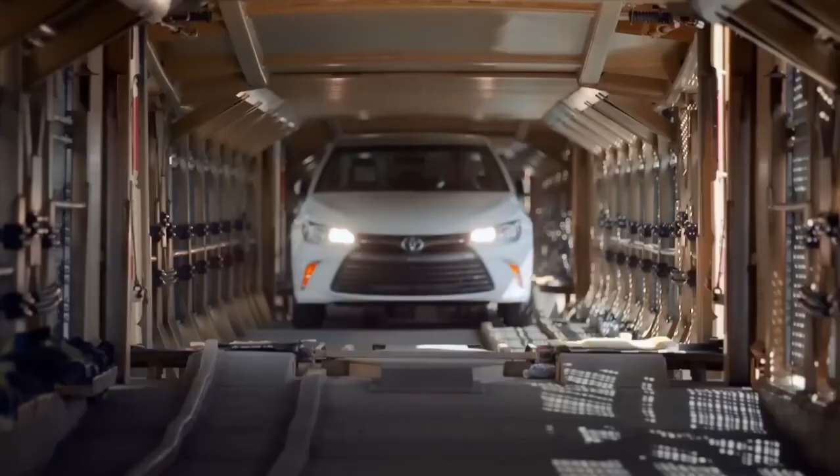While many other car makers have gone all in on electric power, Toyota's charting a brand new course. They've invented a brand new technology that's unlike anything we've ever seen before. Picture this, a revolutionary engine called the hydrogen combustion engine. It runs on hydrogen as its main fuel, hence the name.

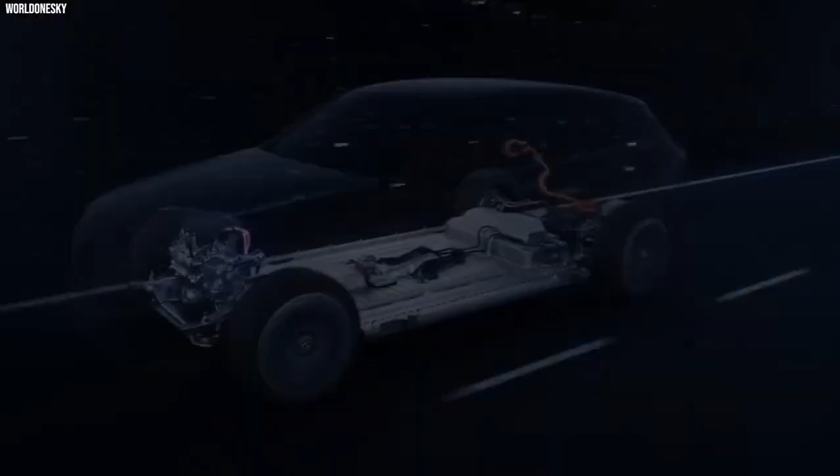Now, what's truly special about this engine is what comes out of its exhaust pipe, not harmful carbon dioxide, but pure water. It's Toyota's innovative solution to shrink our global carbon footprint. Now, Toyota is taking a whole new approach to cutting carbon emissions worldwide.

While most are hopping on the electric vehicle bandwagon, Toyota's chosen a different path with their hydrogen combustion engine. And there's a good reason for it. Hydrogen, one of the universe's most abundant elements, packs the highest energy density of any non-nuclear power source.

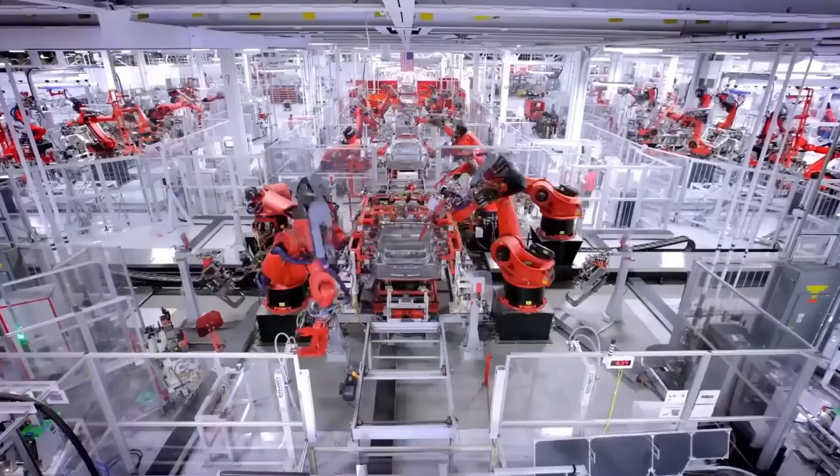When used as fuel, it's clean as a whistle, emitting nothing but water. Plus, it's safe and versatile, easily produced, stored, and transported. Surprisingly, hydrogen isn't some futuristic dream, it's already here, quietly powering various applications. From buildings to electric cars, forklifts to ships, and even trains, hydrogen is already making waves, proving that not everything needs gasoline to run.

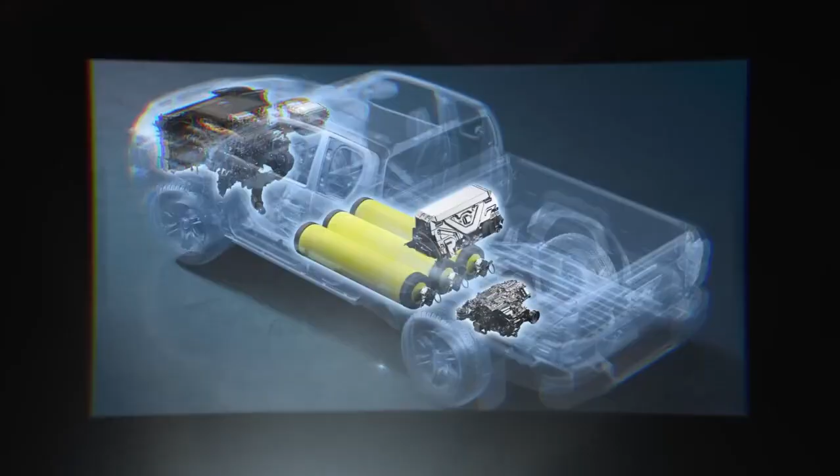Imagine a magic box inside Toyota's hydrogen combustion engine called a fuel cell. What does this magic box do? It turns hydrogen, a special gas, into electricity.

Now, let's zoom in on a cool car, the Toyota Corolla Cross H2 concept car. It's got a snazzy 1.6-liter turbocharged, 3-cylinder engine that guzzles only hydrogen. But how did Toyota pull off this wizardry?

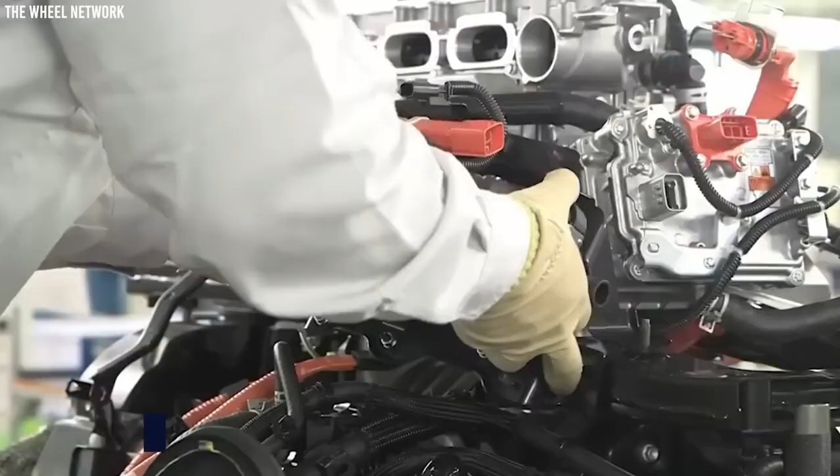Well, this was the moment when Toyota kicked off a revolution in the electric vehicle world. These new engines were game changers, ready to shake up the whole industry forever. Toyota uses tough, armored tanks to stash the super flammable hydrogen fuel.

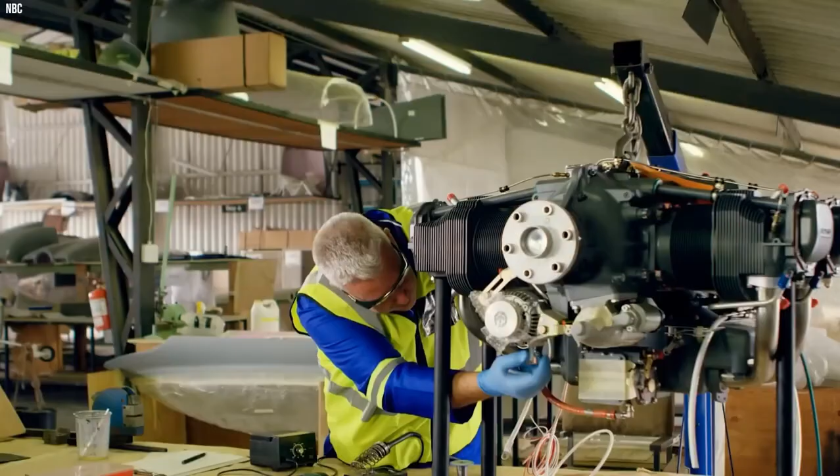They got this bright idea from their FCEV pal, the Mirai. And guess what? These tanks don't have to be huge. The Corolla Cross H2 concept car runs on just 5 kilograms of hydrogen.

Sounds like a little, right? But guess what? That tiny amount can power this car for a whopping 300 miles. And get this, the only thing it spits out is 50 liters of water. Not too shabby, considering water is harmless compared to the nasty carbon dioxide.

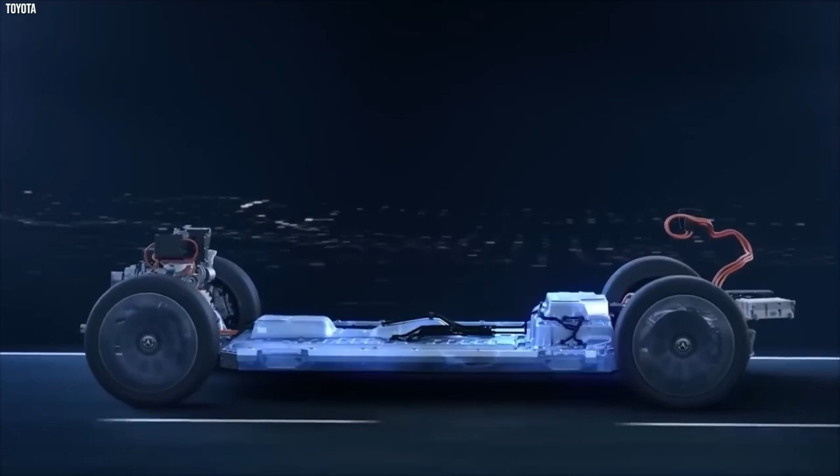But wait, Toyota teamed up with Yamaha Motor to create a beastly V8 engine powered solely by hydrogen. This bad boy pumps out a jaw-dropping 455 horsepower and 398 pound-feet of torque. And for that extra oomph, they slapped on an 8-to-1 top-mounted exhaust manifold, giving it a distinct, high-frequency growl.

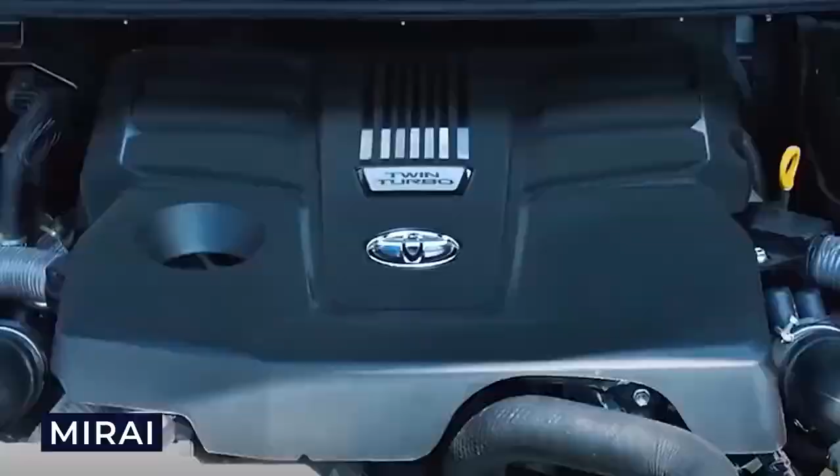When you stack up Toyota's hydrogen combustion engine against other electric vehicles, it's got some serious perks. For starters, it boasts a longer range, and refueling faster than a drag race pit stop. By achieving this, it cuts down on the need for materials like lithium and nickel, which are crucial for making EV batteries. And the battery in this car isn't as hefty as those in traditional EVs.

Interestingly, there is already lots of feedback coming in for this mind-blowing engine, the revolutionary hydrogen engine.

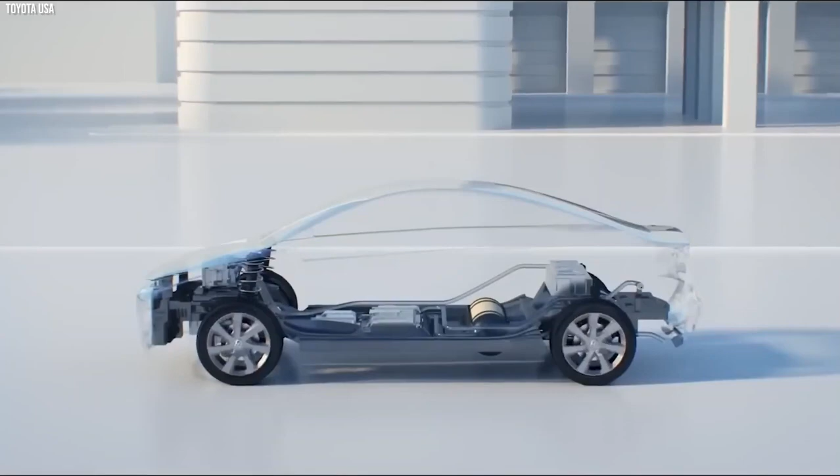The feedback on Toyota's new hydrogen combustion engine has been overwhelmingly positive so far. It's not just another engine, it's a game changer in the automotive world. Why? Because it's one of the greenest engines out there, leaving nothing but water in its wake. Plus, it offers a longer driving range, quick refueling times, and cuts down on the need for scarce materials. But we're still waiting to see how it performs in real-world tests.

But mark my words, it won't be long before these cars hit the streets in droves. And guess what? If these hydrogen-powered engines prove successful, the Japanese government has big plans.

They aim to have a whopping 200,000 fuel cell-powered vehicles cruising around by 2025, that's just a year away. And by 2030, they are shooting for a staggering 800,000. Of course, to make this happen, they'll need to beef up the country's network of refueling stations.

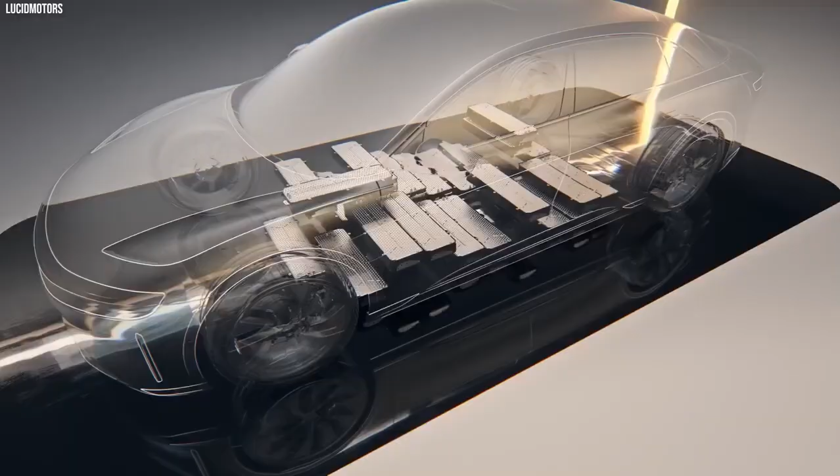Let's break down the perks of this engine, starting with the most obvious: it's super eco-friendly. How so? Well, because it runs on hydrogen, it doesn't spit out any nasty pollutants like traditional gas guzzlers. Plus, hydrogen itself is squeaky clean compared to old-school gasoline.

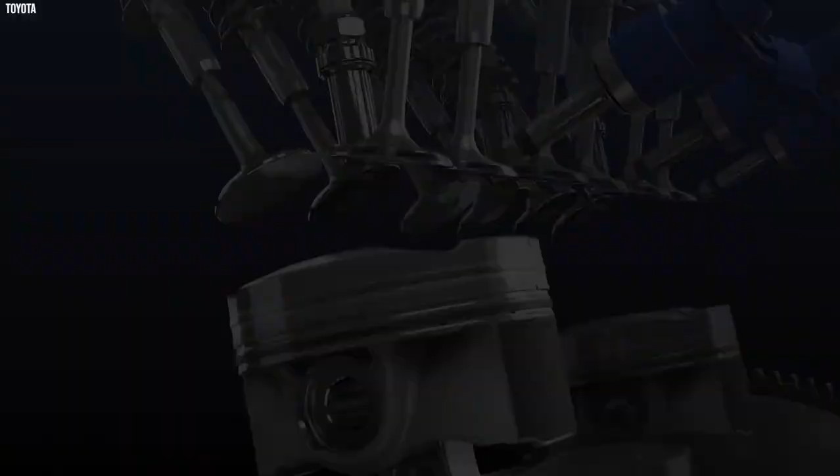Now, onto advantage number 2, this engine rocks a top-notch cooling system. A smart water cooling setup tackles the pesky problem of engine overheating. With this nifty system in place, the engine's performance and lifespan get a major boost. Say goodbye to sweaty palms worrying about overheating, this engine's got your back.

Last but not least, advantage number 3, it's all about familiar tech. Yep, you heard that right. Despite its futuristic vibes, this engine sticks to good reliable technology that we're all familiar with. So, no need to fret about learning a whole new set of skills to handle it.

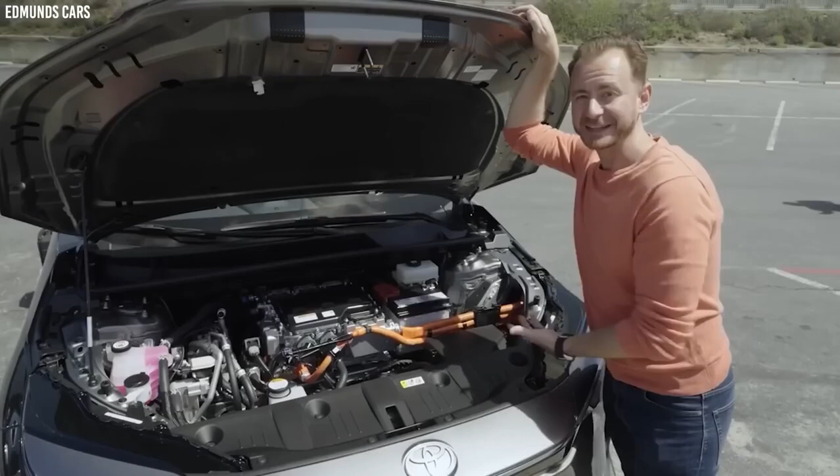Let's delve deeper into the perks of this engine. Firstly, its compatibility with traditional engine systems makes it a dream to integrate into existing automotive designs. This means Toyota can easily adapt their current vehicle models to accommodate this innovative engine, streamlining the manufacturing process and potentially bringing eco-friendly technology to a wider range of cars.

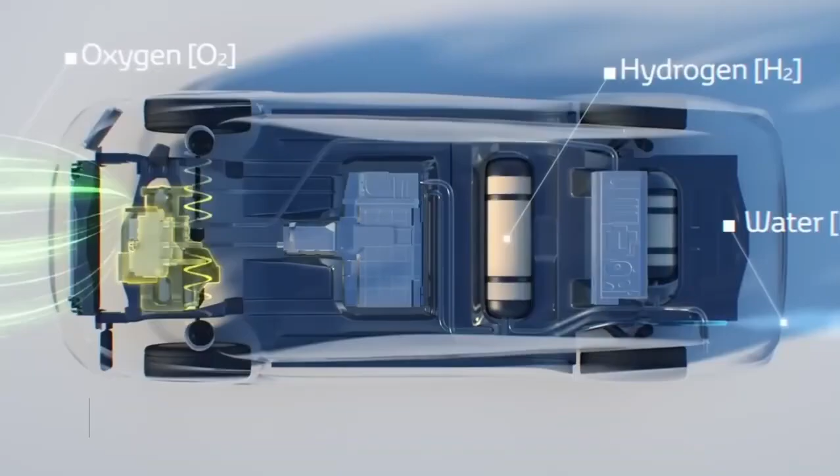Now, while hydrogen-powered engines are an innovation like no other, they are not without their own peculiar challenges. Challenges of the hydrogen engine. While this engine boasts eco-friendliness, not all hydrogen production methods are created equal in terms of environmental impact.

Currently, a significant portion of hydrogen is derived from fossil fuels, like natural gas, which isn't exactly planet-friendly. To truly maximize the green benefits of this engine, automakers like Toyota must push for advancements in sustainable hydrogen production methods, such as electrolysis powered by renewable energy sources like wind or solar.

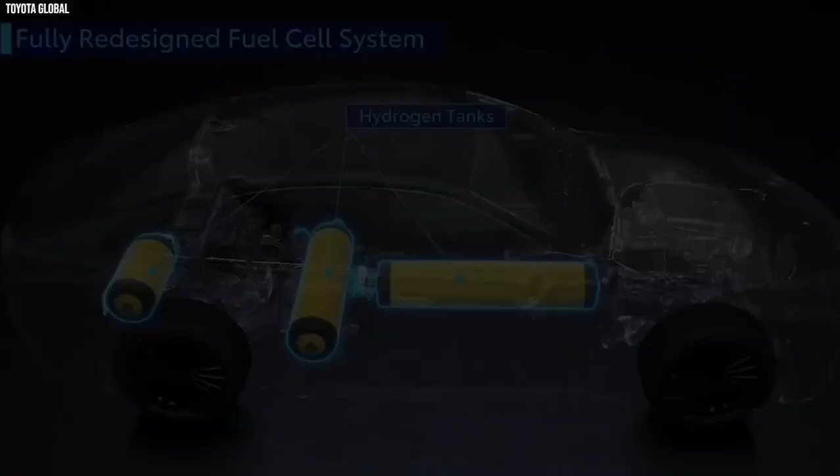But that's not the only hurdle. Even if hydrogen production becomes more eco-friendly, there's still the matter of infrastructure. Imagine you're cruising in your hydrogen-powered car but suddenly realize you need a refill. Where do you go? Unfortunately, hydrogen fueling stations are still relatively sparse compared to gasoline stations. This poses a challenge for the widespread adoption of hydrogen-powered vehicles.

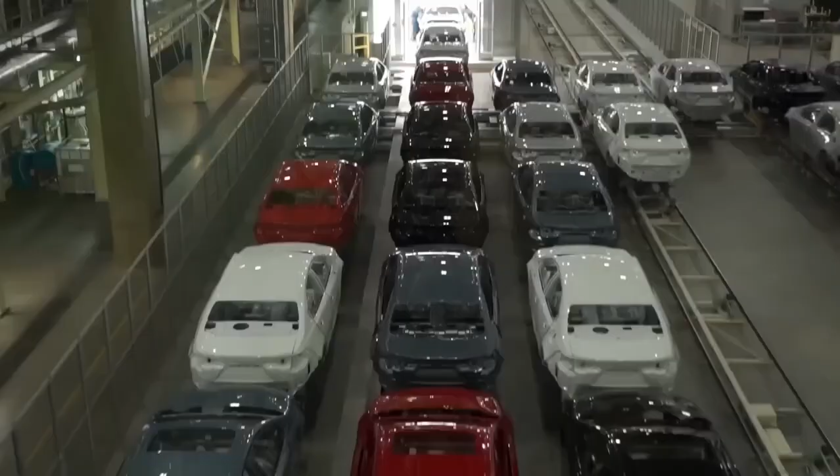To address this, companies and governments must invest in expanding the hydrogen refueling infrastructure, ensuring that drivers have convenient access to fuel wherever they go.

So, while the hydrogen combustion engine holds great promise for reducing emissions and revolutionizing the automotive industry, there are still hurdles to overcome. However, with continued innovation and investment, these challenges can be overcome, paving the way for a greener future on the road. Now, onto the technical side.

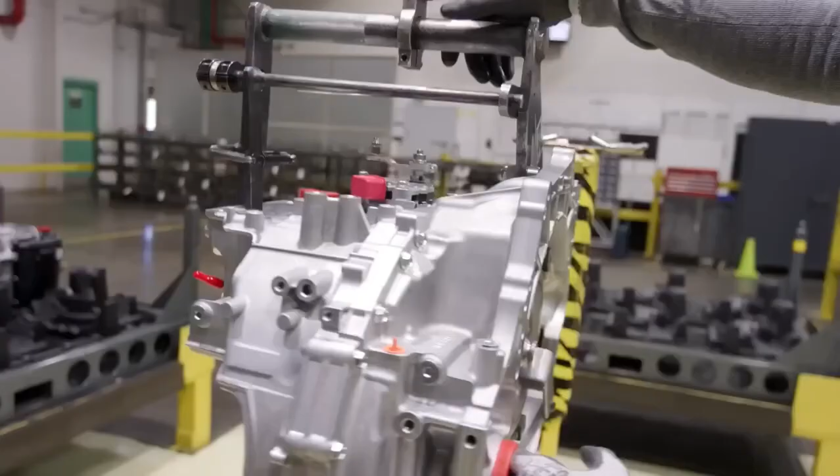While hydrogen engines share similarities with traditional engines, they are not without their complexities. Take, for example, the dual water injection system. It's a clever mechanism, but it adds layers of intricacy to the engine's design. Plus, these engines require precise control from the Engine Control Unit, ECU, which further complicates matters.

Complexity comes with a hefty price tag. Manufacturing these high-tech engines isn't cheap, and the same goes for maintenance. Finding specialized parts for repairs can be a headache, driving up costs for both the automaker and the owner.

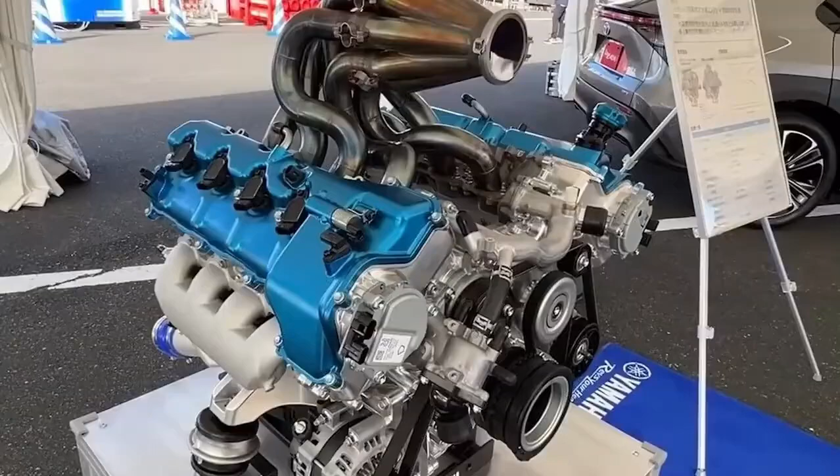Interestingly, even if Toyota ramps up production of these engines, they'll still face the challenge of consumer acceptance. Right now, the technology is still in the testing and development phase. And even when it's ready for prime time, it'll take some time before consumers embrace it fully.

Despite these hurdles, Toyota's commitment to sustainable transportation is commendable. By venturing into hydrogen combustion engines, they are paving the way for a greener future in the automotive industry. It's a bold move that shows their dedication to innovation and environmental stewardship, even if the road ahead is filled with challenges. However, Toyota has proven to be committed to offering sustainable vehicles.

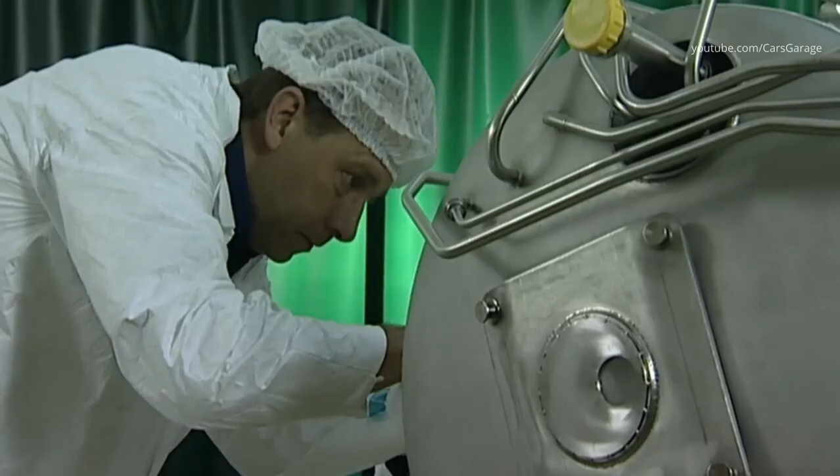Toyota's terrific turbocharged triumph. Apart from their electric and hybrid engines, Toyota has unveiled another innovative solution. Enter the hydrogen combustion engine, showcasing the company's commitment to offering diverse sustainable vehicle options.

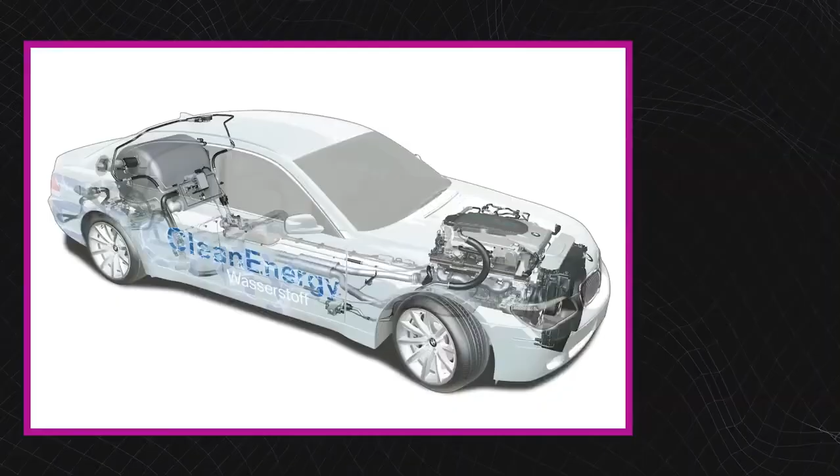Now, we've been singing praises for the combustion engine, highlighting its potential to shake up the entire electric vehicle (EV) industry. But how does it differ from the traditional internal combustion engine? What sets it apart technically? To unravel these mysteries, let's zoom in on one of Toyota's remarkable achievements, the 1.6-liter, 3-cylinder turbo engine. You might be wondering why we're focusing on this particular engine.

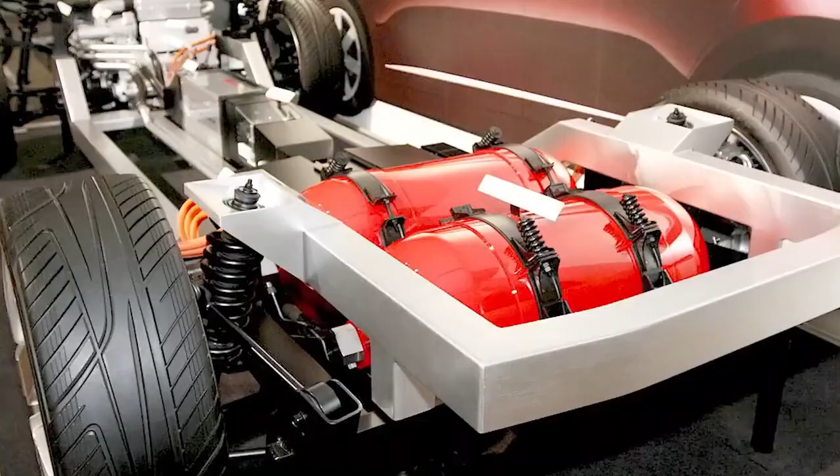Well, it's because it's one of Toyota's shining stars in the world of hydrogen engines. Currently powering the Corolla Cross hydrogen prototype, this engine is proving its mettle and exceeding expectations. This engine is truly a masterpiece, seamlessly blending the best of both worlds, classic design and groundbreaking technology. But it's unlike anything you've seen in a traditional internal combustion engine.

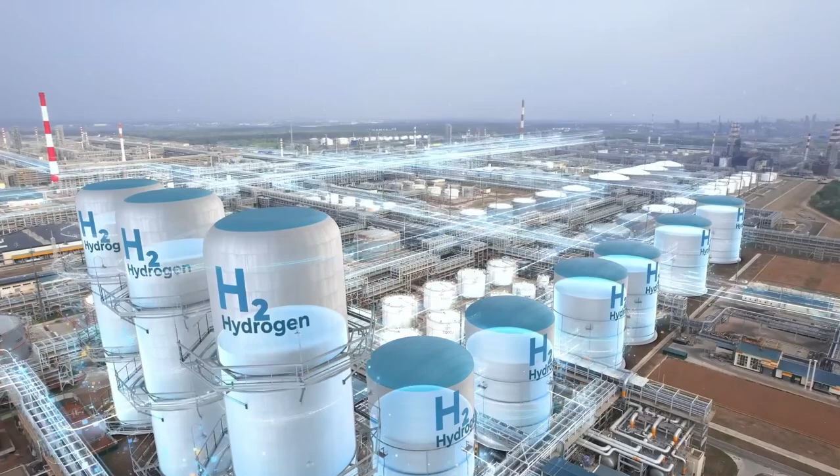To adapt this engine to run on hydrogen fuel, Toyota had to roll up their sleeves and get creative. They made a slew of modifications, tweaking every component to ensure seamless compatibility with hydrogen. It was a bold move that left many scratching their heads.

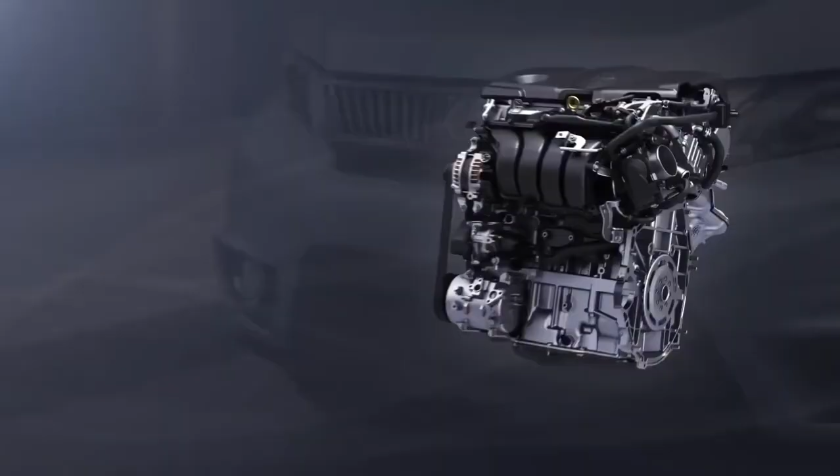Now, let's talk about the million-dollar question. How did Toyota manage to maintain the engine's stellar performance while transitioning to a completely different fuel source? The hydrogen combustion process is a delicate dance between fuel and engine, orchestrated with precision to deliver top-notch performance without compromising on efficiency or environmental friendliness.

When it comes to handling and burning fuel, hydrogen is a whole different ballgame compared to gasoline. That's why this engine uses a fancy high-pressure hydrogen direct injection system, a far cry from the usual fuel injection setups you see in traditional engines. With this system, the engine can carefully control how hydrogen is pumped into the combustion chamber, fine-tuning performance and efficiency to perfection. But how does this entire fancy tech affect the engine's overall performance?

Despite running on hydrogen, this engine packs a serious punch. The 1.6-liter powerhouse churns out enough power and torque to give its gasoline-powered counterparts a run for their money. And you know what the cherry on top is? It's all thanks to the turbocharger, a superhero of sorts in the engine world. This little gizmo ensures the engine gets the extra boost it needs to perform at its peak.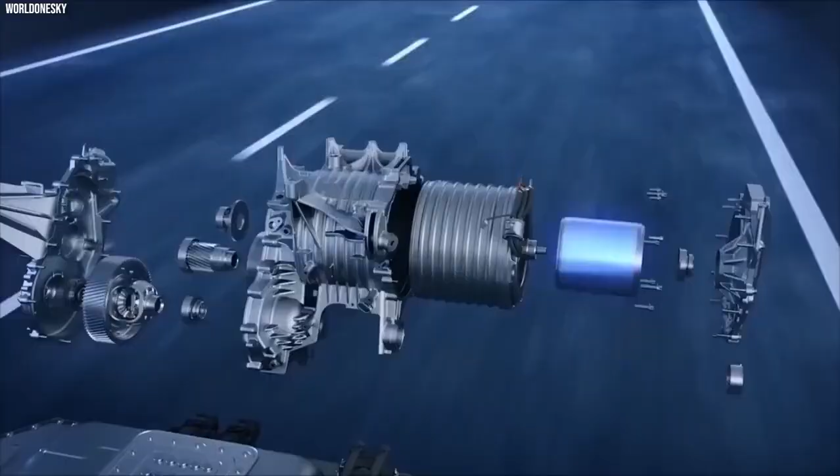Besides, there's been some chatter about whether turbocharging is the right move for a hydrogen engine. It's a valid concern, considering hydrogen's unique properties. But rest assured, Toyota's got some tricks up its sleeve to tackle this challenge head-on.

The big worry here is that hydrogen isn't as dense as gasoline. What does that mean? It means the engine needs a lot more hydrogen to produce the same amount of energy as gasoline would. But fear not, Toyota's engineers aren't ones to back down from a challenge. They've rolled up their sleeves and made sure the turbocharger and other engine parts are optimized to handle hydrogen's unique properties.

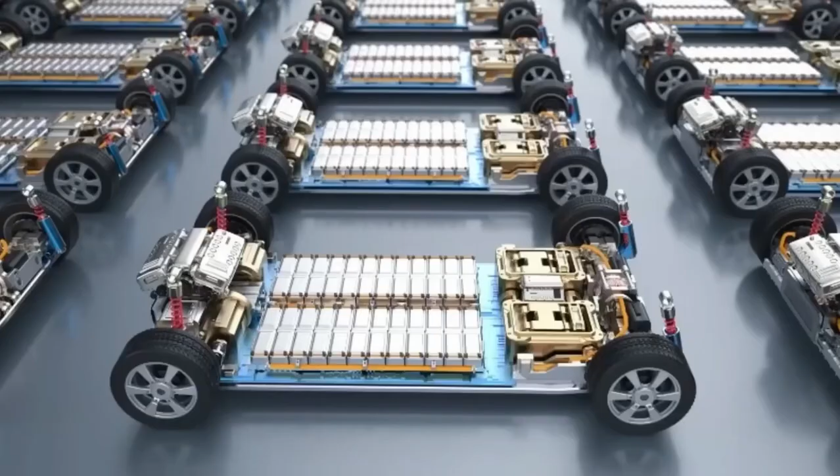But this engine isn't just efficient, it's super efficient. Turns out, hydrogen combustion engines are way more efficient than traditional ones, especially when things get intense during heavy-duty tasks. And you know what that means? Better fuel economy and less harm to the environment. With this boost in efficiency, the engine sips fuel more slowly, meaning fewer emissions are belched out into the air.

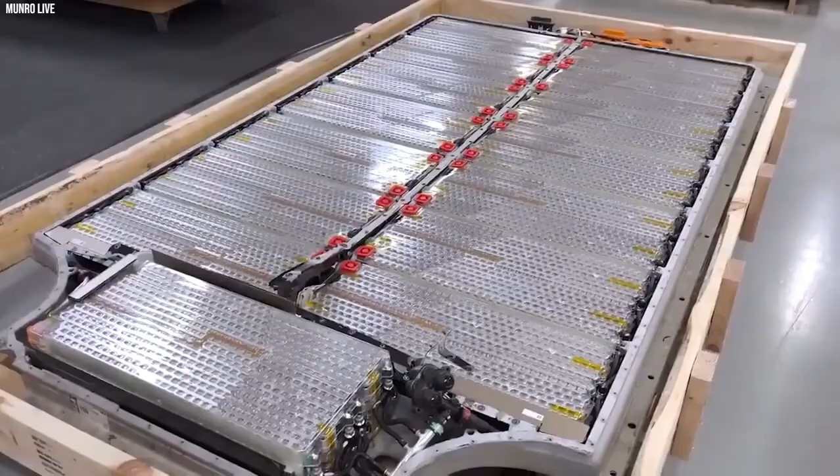And get this, the only thing that comes out of the tailpipe is water vapor. Yep, you heard that right, near-zero emissions. That's what makes this engine one of the greenest options out there, and a true champion for the environment. But that's not all. Toyota went even further to achieve an unprecedented feat with this engine.

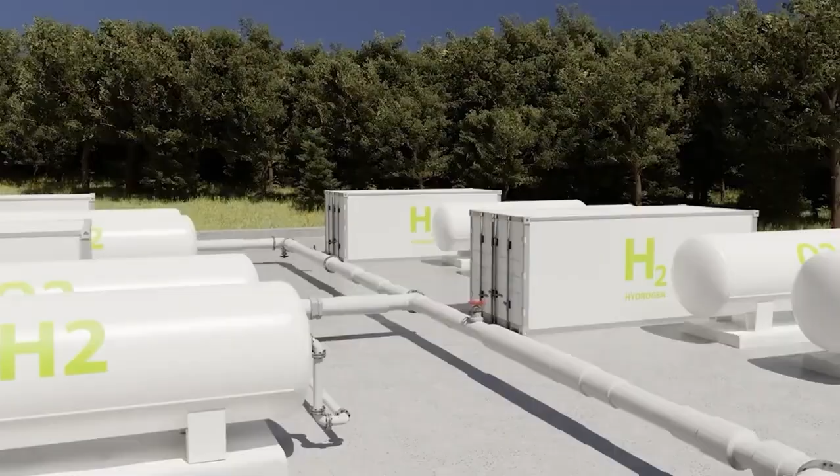Toyota's pioneer hydrogen and electric technologies. According to Toyota's CEO, the company's commitment to achieving near-zero emissions with their hydrogen engine isn't just a passing fad, it's a key part of their broader mission to combat climate change. As they march towards carbon neutrality, they are not relying on just one strategy. Instead, they are embracing a multifaceted approach that combines hydrogen and electric technologies.

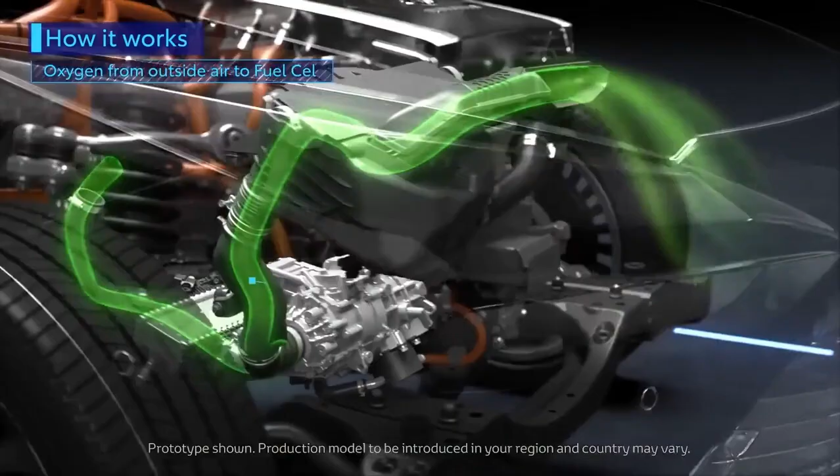But why is the emphasis on hydrogen? Well, aside from its eco-friendly emissions profile, hydrogen boasts incredible versatility. It's not just for powering passenger cars, it has the potential to revolutionize various sectors, from transportation to industry to energy storage. The Toyota CEO also states that Toyota's investment in hydrogen technology isn't limited to passenger vehicles.

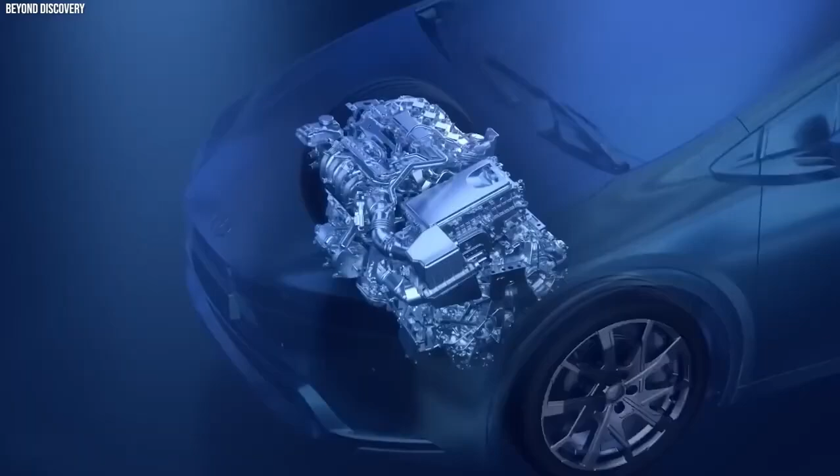They are exploring its applications across the board, from buses and trucks to forklifts and even stationary power generation. This holistic approach underscores Toyota's commitment to driving sustainability across all aspects of society.

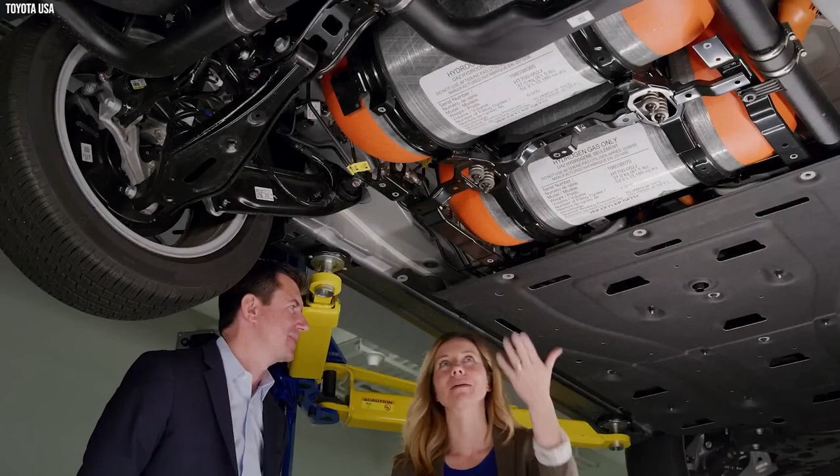Moreover, hydrogen isn't just a cleaner alternative to fossil fuels, it's also renewable. By harnessing renewable energy sources like wind or solar to produce hydrogen through processes like electrolysis, Toyota is helping to create a truly sustainable energy ecosystem. So, while achieving near-zero emissions with their hydrogen engine is a significant milestone for Toyota, it's just one piece of the puzzle in their larger vision for a greener, more sustainable future.

Toyota has already implemented it in commercial vehicles and even public transportation solutions. But can hydrogen alone get us to carbon neutrality?

Well, Toyota's not putting all their eggs in one basket. They've recognized the importance of diversifying their approach, which is why they've also embraced electric vehicle (EV) technology.

Now, the EVs. Toyota's not taking the same route as other car makers that are solely focused on EVs. Instead, they are taking a more nuanced approach. They know there are some big challenges with EVs, like limited range, long charging times, and the environmental impact of battery production and disposal. To tackle these hurdles head-on, Toyota's offering a range of powertrain options. You've got your hydrogen fuel cell vehicles, plug-in hybrid electric vehicles (PHEVs), and good old battery electric vehicles (BEVs).

With this diverse lineup, Toyota's aiming to meet the needs of a wide range of customers. Whether you're looking for eco-friendly commuting or long-distance travel, they've got something for everyone. It's all part of their commitment to driving sustainability forward while keeping you on the road in style.

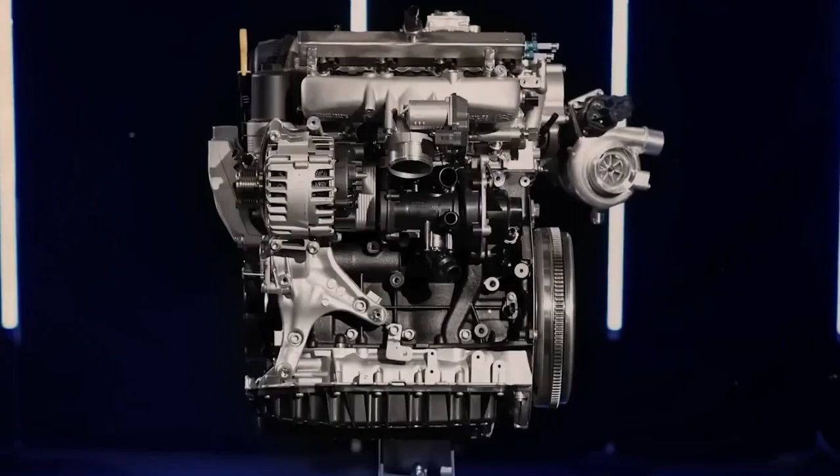This whole diverse strategy is all about reaching carbon neutrality. Achieving carbon neutrality is a big goal. But Toyota didn't just stumble upon this, they've found different ways to make it happen. One key thing they've realized is that different places have different energy sources, rules, and policies about the environment. So a one-size-fits-all approach might not cut it when it comes to cutting down global carbon emissions.

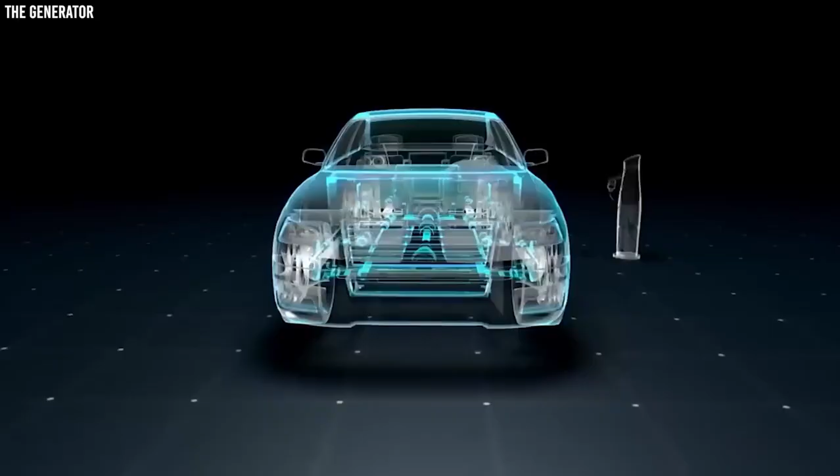Take, for instance, areas that use renewable energy. For them, battery electric vehicles (BEVs) would be the perfect fit. But in places where hydrogen production comes from renewable sources, fuel cell electric vehicles (FCEVs) and hydrogen internal combustion engine vehicles (HYCEs) might be a better bet.

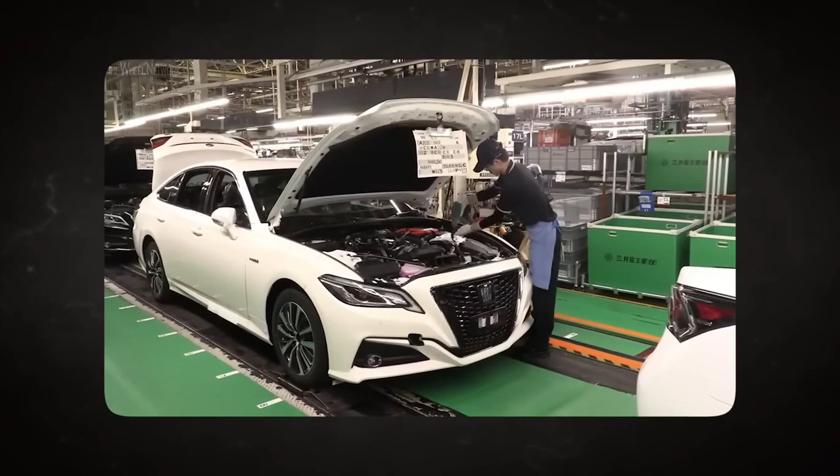And Toyota's commitment to carbon neutrality goes beyond just what comes out of the tailpipe. Now the company is doing a whole lot of things differently. They are thinking of the big picture and looking at everything from manufacturing to how you use the car. Developing sustainable technologies for a greener environment.

Toyota is really getting into the swing of things when it comes to reducing the carbon footprint of its manufacturing processes. They're not just talking the talk, they're walking the walk by promoting recycling, making sure resources are used efficiently, and putting their money where their mouth is with investments in renewable energy projects. Besides, there's always more to be done when it comes to reaching big goals like carbon neutrality.

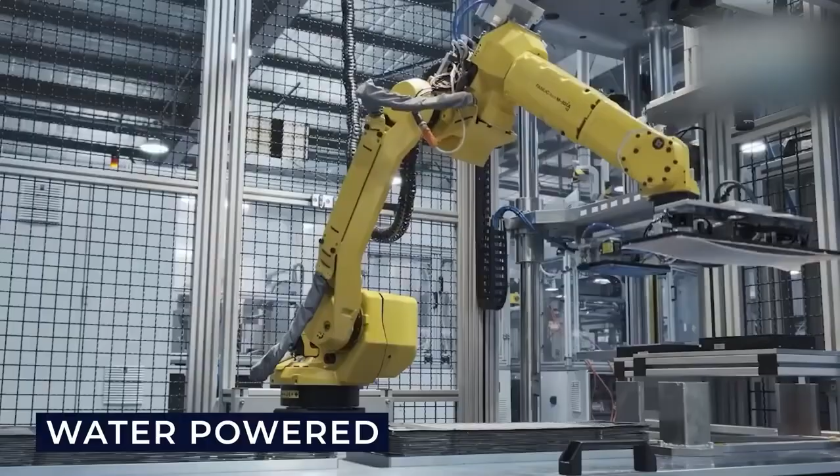To really understand the impact of Toyota's strategy, you've got to zoom out and look at the big picture. Achieving a society that's nearly carbon neutral is no small feat. It's not just about tweaking vehicle technology, it's also about how we make and use energy. But fear not, Toyota's not taking a one-size-fits-all approach. They are tackling these challenges head-on with a multi-pronged strategy that covers all the bases.

And the best part is that it's not just about achieving carbon neutrality. This move from Toyota comes with a whole bunch of environmental perks that you might not even realize. Let's take a moment to rewind and unpack the advantages of Toyota's hydrogen-powered internal combustion engines. The promise of hydrogen engines.

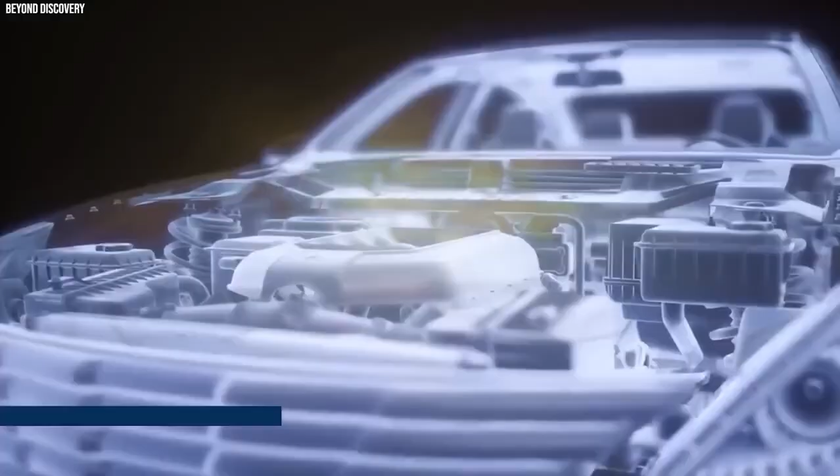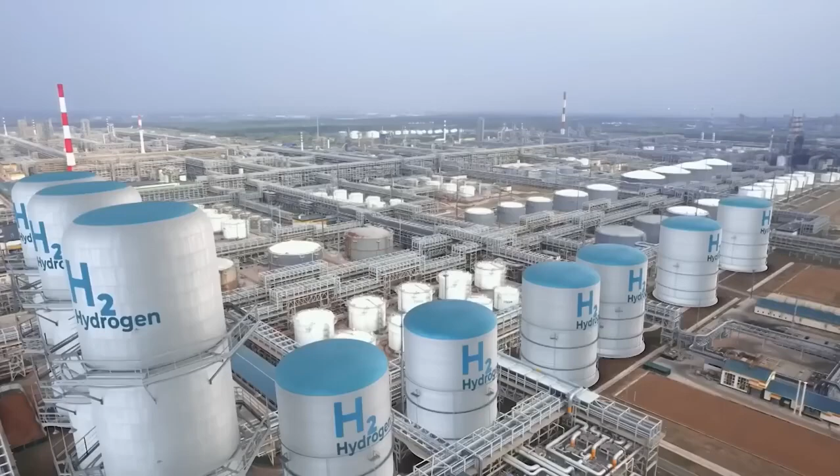In a world where sustainability is becoming increasingly crucial, these engines present a tantalizing prospect for the automotive industry. But how do they stack up against their electric counterparts, like hybrid electric vehicles (HEVs) and plug-in hybrid electric vehicles (PHEVs)? To understand this, we need to delve deeper into what sets hydrogen engines apart, especially in terms of their environmental impact. The real game changer here is emissions.

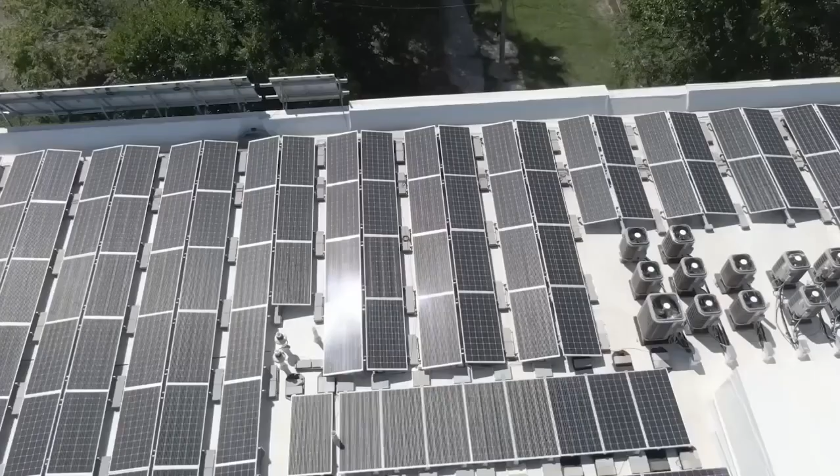Traditional gasoline engines churn out significant amounts of carbon dioxide, contributing heavily to the greenhouse effect and global warming. However, Toyota's hydrogen engines operate on a whole different level. They produce zilch, nada, zero carbon dioxide during their entire lifespan. This means they are not just reducing emissions, they are eliminating them altogether.

Zero emissions and green technology. But achieving zero carbon emissions isn't some far-off fantasy. It's a tangible reality, thanks to advancements in hydrogen technology. And Toyota is at the forefront of this green revolution, paving the way for a cleaner, greener automotive future.

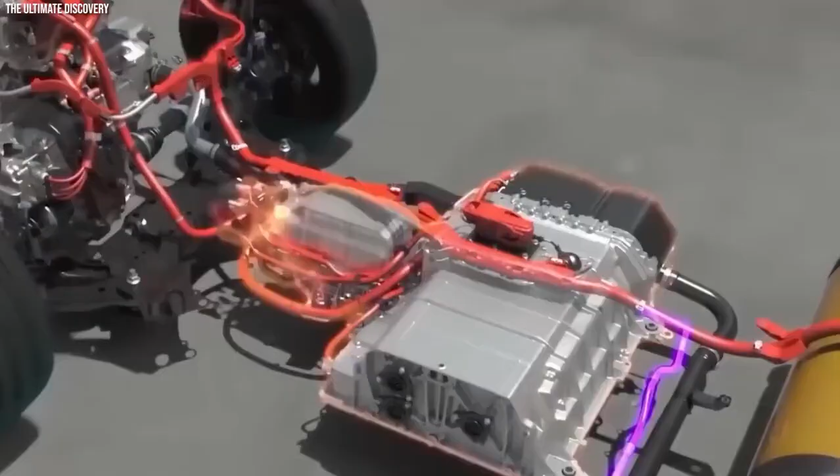However, above all this, all vehicle companies have their secrets in creating cars, and Toyota has one too. The magic behind hydrogen engines lies in their combustion process. When hydrogen fuel burns, it joins forces with oxygen from the air, creating energy.

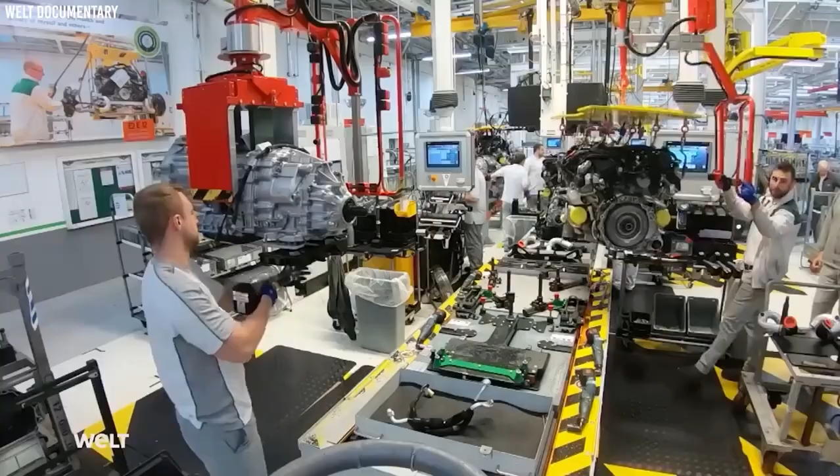Now, let's not delve too deeply into the chemistry, but when hydrogen and oxygen mingle, they create H2O, water vapor, plain and simple. And get this, that's the only thing that comes out of the whole shebang. Hybrid electric vehicles versus hydrogen engines.

But what about hybrid electric vehicles (HEVs) and plug-in hybrid electric vehicles (PHEVs)? HEVs team up a gasoline engine with an electric motor, while PHEVs charge their batteries by plugging into an outlet. Both promise better fuel efficiency and lower emissions compared to old-school gasoline vehicles. But here's the catch: they still rely on gasoline, which means they still emit carbon dioxide when running. It might not be as much as before, but it's still there, lingering in the air.

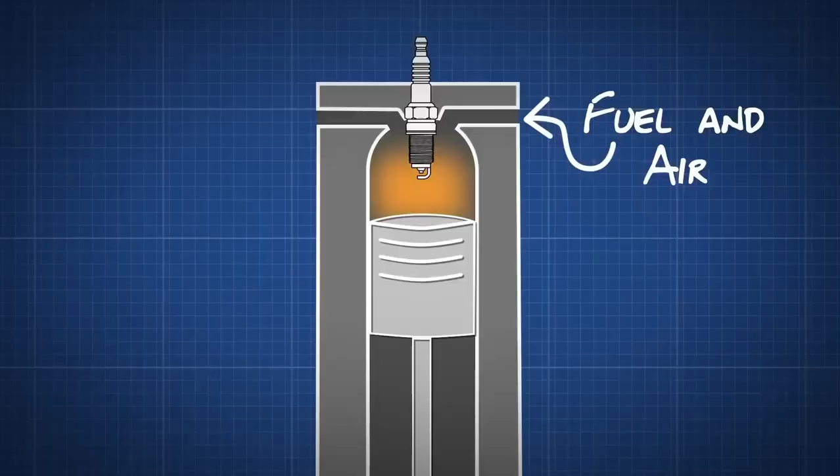On the flip side, hydrogen engines offer a whole new world of possibility: true zero-emission driving. That's right, no carbon dioxide emissions to be found here. It's a game-changer in the fight against pollution and climate change. For hydrogen engines to truly be environmentally friendly, the hydrogen fuel needs to be sourced sustainably, coming from renewable sources like wind or solar power.

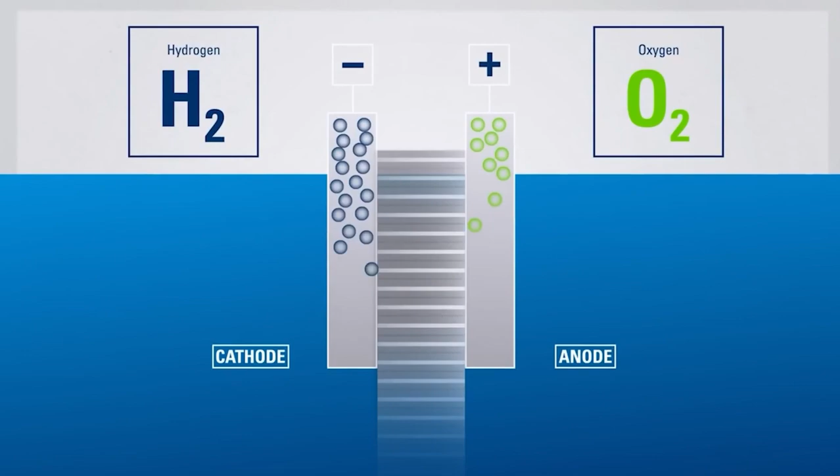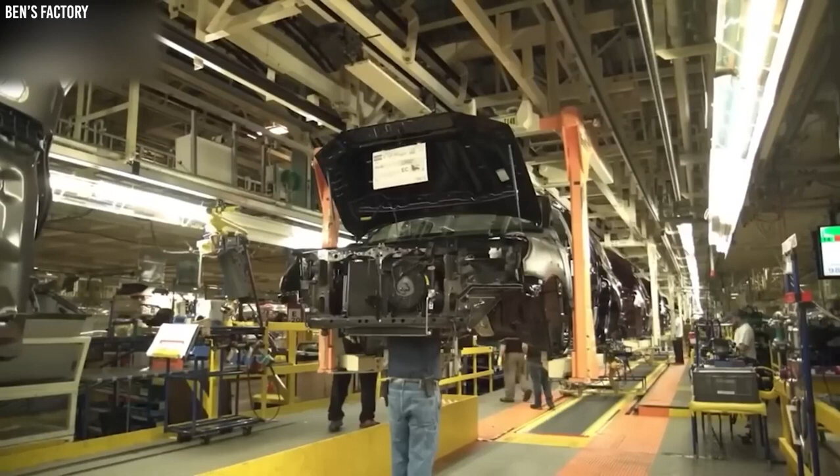Considering life cycle emissions is another crucial thing to think about. When you're putting together HEVs and PHEVs, you need batteries, and making those batteries is no walk in the park. It takes a whole lot of energy-intensive manufacturing processes that pump out a bunch of carbon into the environment, which isn't great news. But hydrogen engines sidestep all these issues. The production of hydrogen fuel, especially when made from renewable sources like wind or solar power, can be way gentler on the environment than battery production. Taking all of this into account, hydrogen engines offer a more sustainable overall life cycle.

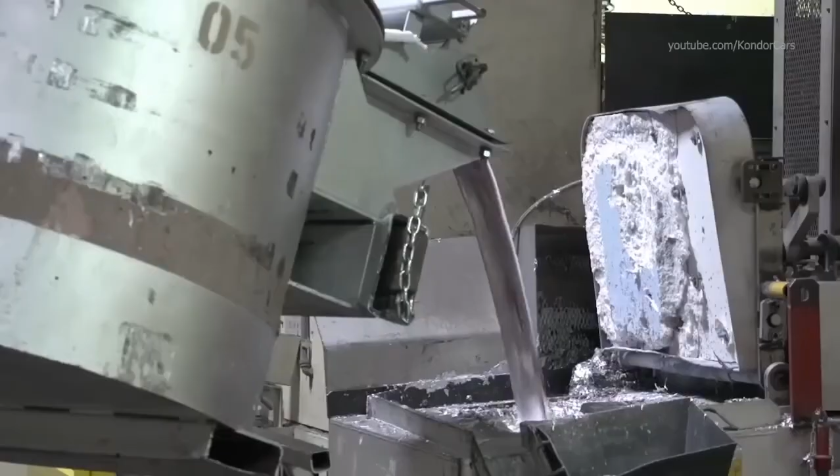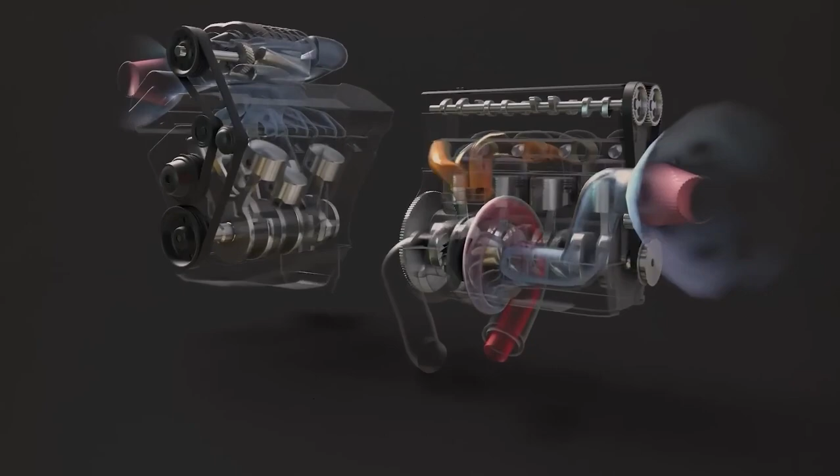The efficiency of hydrogen engines is remarkable. We've already seen that hydrogen combustion engines are practically wizards when it comes to efficiency, leaving traditional combustion engines in the dust and paving the way for a greener, more efficient future. Especially in heavy-duty applications, hydrogen engines truly shine, standing toe-to-toe with hydrogen fuel cells in terms of efficiency. Fuel cells hit peak efficiency at low load, but that efficiency takes a nosedive under heavier load. Hydrogen combustion engines hit their stride when the pressure's on, like superheroes of the engine world, ready to tackle any challenge, especially where top-notch performance is non-negotiable. Moreover, fighting against climate change and dwindling resources doesn't strike out either.

Redefining the driving experience, Toyota is coming up with engines that are game changers in fighting against climate change and decreasing resources. Toyota's hydrogen engines are the real deal when it comes to cleaner, greener transportation. They've made big promises and delivered without sacrificing a bit of performance or practicality.

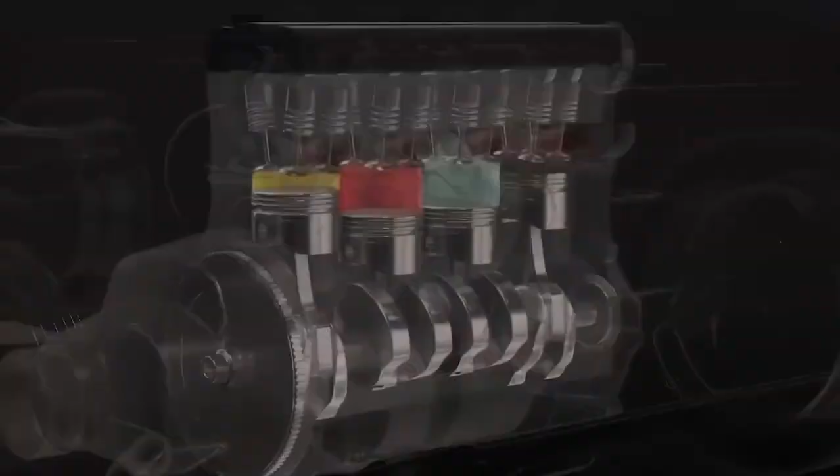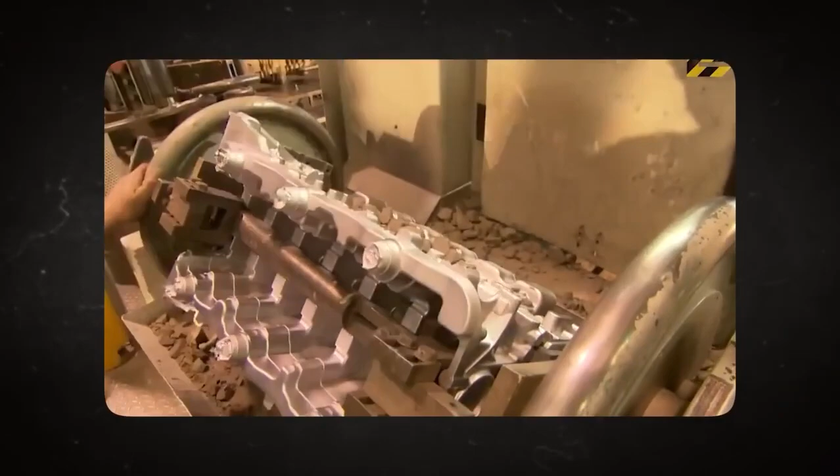But how do these engines pull off performance that rivals gasoline engines? It all boils down to the nature of hydrogen as a fuel. Compared to gasoline, hydrogen burns faster, and when I say faster, I mean lightning fast. This rapid combustion translates to lightning fast responsiveness, a crucial ingredient for those who love to feel the power at their fingertips when they hit the gas pedal.

Does all this snazzy performance affect the overall driving experience? With a conventional internal combustion engine, drivers expect a certain level of performance. They want that immediate smooth response and that signature growl that makes them feel like they're in the driver's seat of a powerhouse. You know what they're talking about, like when you hear that Dodge Charger revving up, ready to tear up the road. It's all about that raw, visceral experience behind the wheel.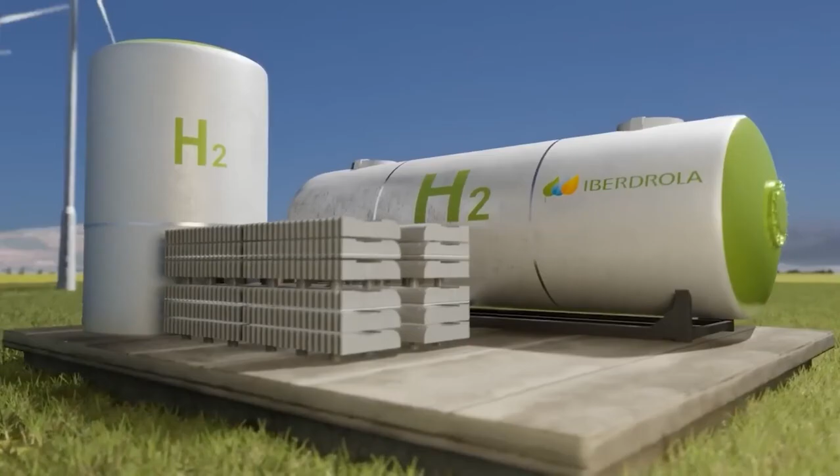The amazing thing about hydrogen internal combustion engine vehicles (HICEVs) is that they can recreate the same driving experience as traditional cars. Even though they run on a clean fuel source, drivers of Toyota's hydrogen-powered cars can still feel that same sensation they get from driving a regular car, from the rumble of the engine, which many car enthusiasts say is a crucial part of the driving thrill, to the sheer power it delivers. It's all there.

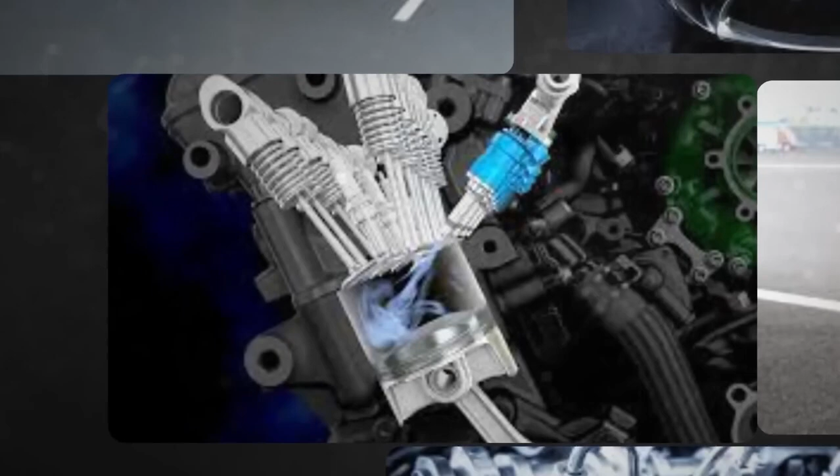But do they perform just as well as regular engines? Toyota decided to put these engines through the ultimate test: the world of motorsports. They threw a hydrogen-powered vehicle into the racing mix, and boy, did it impress. Not only did it prove the durability of this technology, but it also showed its potential for high-performance applications. In the high-stakes, high-pressure world of racing, HICEVs proved they could go head-to-head with traditional cars.

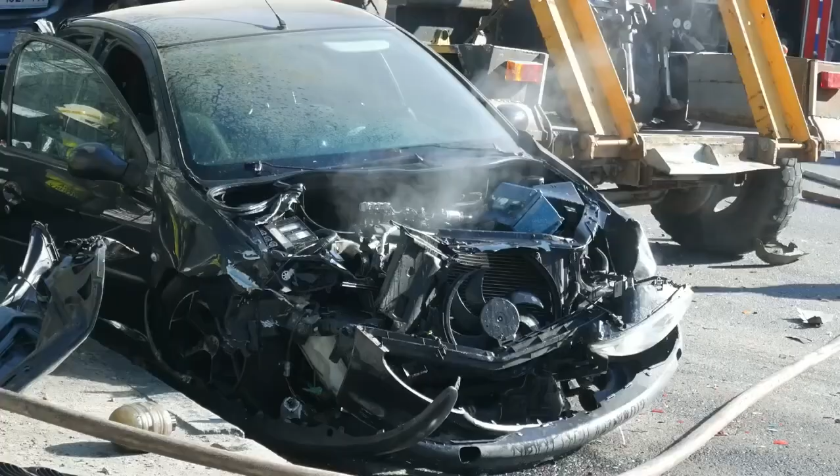They matched them stride for stride in terms of speed, agility, and endurance, all the things that matter most in those critical moments. Hydrogen engines can dish out horsepower and torque levels similar to gasoline engines. It's pretty impressive stuff. By making a few tweaks to existing engine designs to accommodate hydrogen combustion, Toyota has pulled off power outputs that rival those of traditional engines.

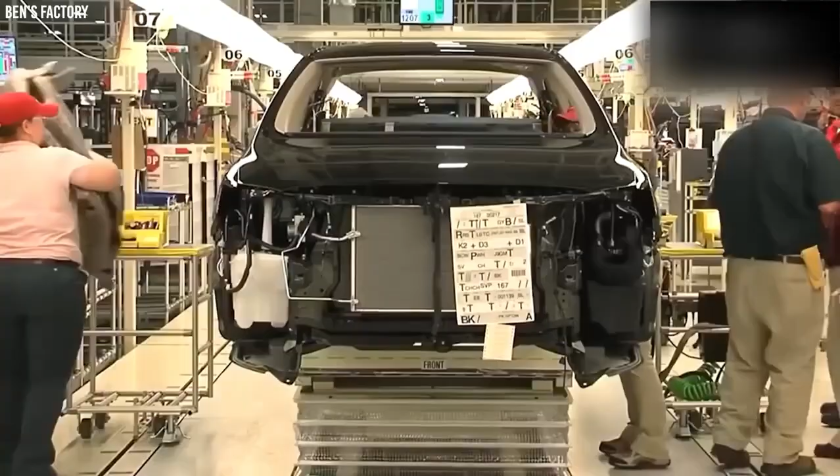It's a testament to their innovation and dedication to pushing the boundaries of automotive technology. Sometimes, the power outputs from hydrogen combustion engines can even surpass those of traditional engines. This is not just a milestone in technology, it's proof that hydrogen could be a game-changer as a viable fuel for high-performance vehicles. But some folks wonder if driving a hydrogen-powered car can match the thrill of driving a gasoline one. While it's a bit subjective, early signs suggest it's more than possible.

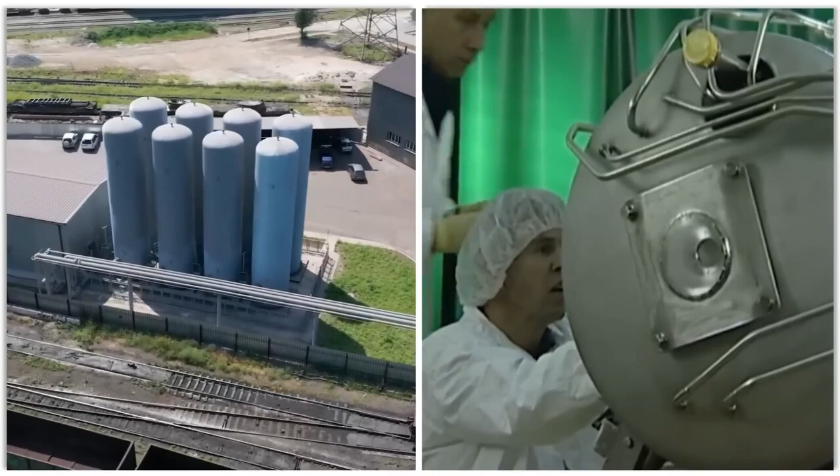There are drivers who've eagerly taken Toyota's hydrogen-powered cars for a spin, and according to their feedback, these rides offer a blend of familiarity and excitement. It's like having the best of both worlds, the traditional feel of a regular engine with the novelty of using a clean, sustainable fuel source. By creating cars that retain the performance of traditional vehicles, Toyota is bridging the gap between the present and the future of automotive tech. Whether it's for everyday commuting or the rush of the racetrack, hydrogen internal combustion engine vehicles, HICEVs, promise to deliver the performance, thrill, and joy that drivers cherish in regular cars, all while ushering in a new era of eco-friendly driving.

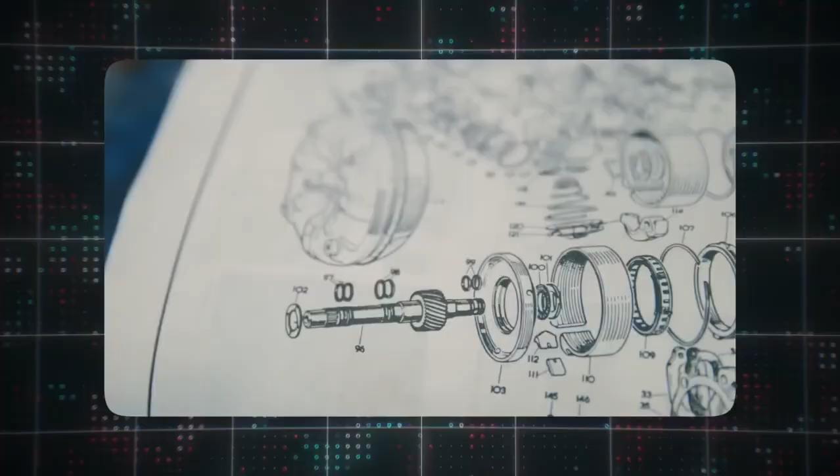But wait, there's more. Toyota isn't stopping there. They've got an even wilder engine in the works, and if it hits the streets, it could turn the electric vehicle industry on its head, or what's left of it after the hydrogen-powered engine. Toyota is equally working on another groundbreaking engine that could further make it a trailblazer in the EV space: the water-powered engine breakthrough. Toyota is delving into the realm of engine tech that's powered entirely by water.

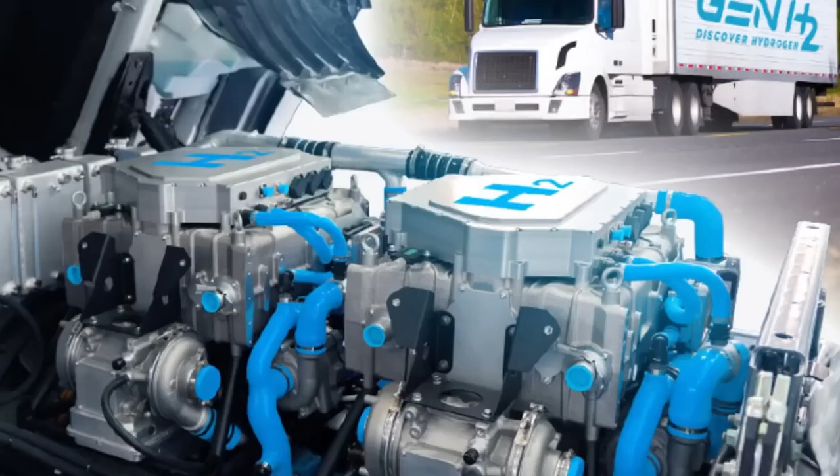It's a giant leap forward in the quest for sustainable solutions. The idea of an engine running on water might sound like something out of a sci-fi movie, but Toyota is dead serious about making it a reality. The key is to use water as fuel. But where does the energy come from? After all, water seems pretty inert, right?

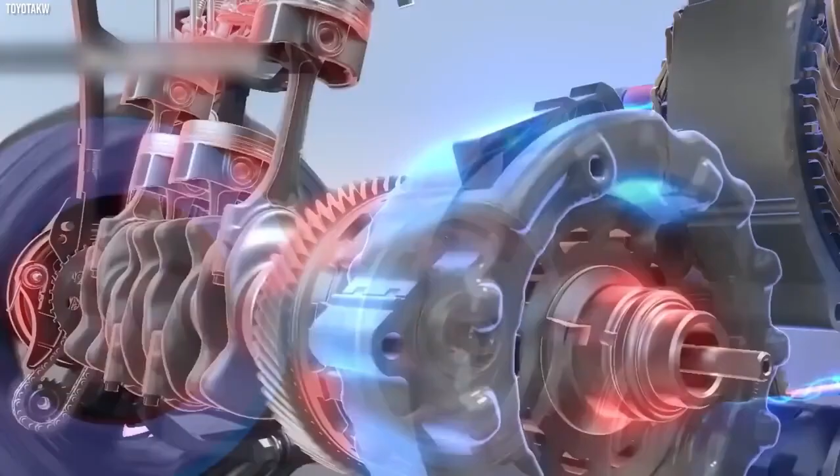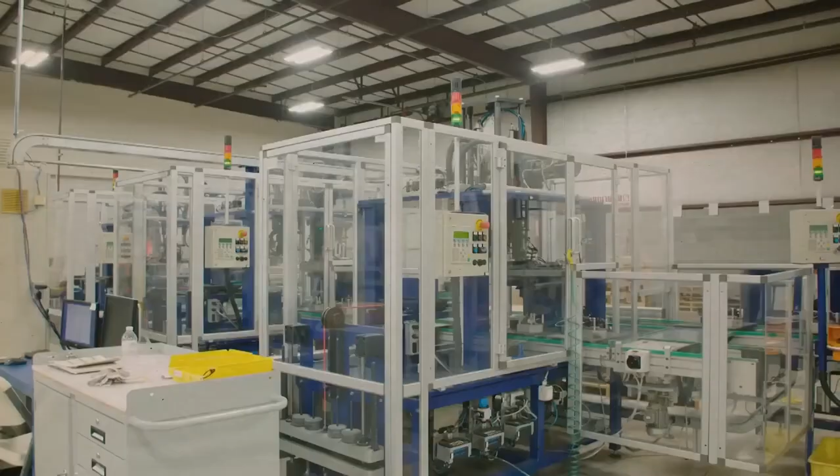Well, here's the scoop. Water, scientifically known as H2O, is made up of two hydrogen atoms bonded to one oxygen atom. To tap into the energy potential of water, you need to separate these hydrogen atoms from the oxygen atom. Fortunately, there's a process for that, called electrolysis. By passing an electric current through water, you can break it down into its building blocks, hydrogen and oxygen. And hydrogen is one heck of a high-energy fuel. When hydrogen is burned, it releases a considerable amount of energy, enough to power an engine when used in larger quantities.

Now, Toyota's water-powered engine would use hydrogen extracted from water as fuel, employing a combustion process similar to traditional gasoline engines. But, unlike gasoline, burning hydrogen produces water as a byproduct, which means absolutely zero carbon emissions. When Toyota unveils this water-powered marvel, it's going to shake up the automotive industry like never before. It's not just another innovation, it's a groundbreaking leap towards environmental sustainability.

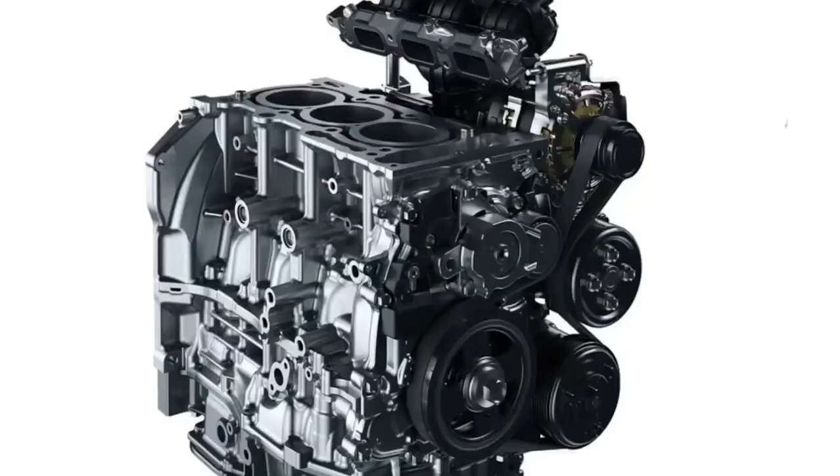What's more, Toyota isn't just toying around with this idea, they are serious about it. They're even filing patents left and right, showing their commitment to developing and safeguarding this game-changing technology.

But integrating water-powered engines into vehicles isn't a walk in the park. There are hurdles to overcome, like designing an efficient electrolysis system to extract hydrogen from water, ensuring safe storage of hydrogen, and engineering engines capable of handling the unique properties of hydrogen combustion. But knowing Toyota's track record in innovation and technological prowess, these challenges are just bumps in the road for them.

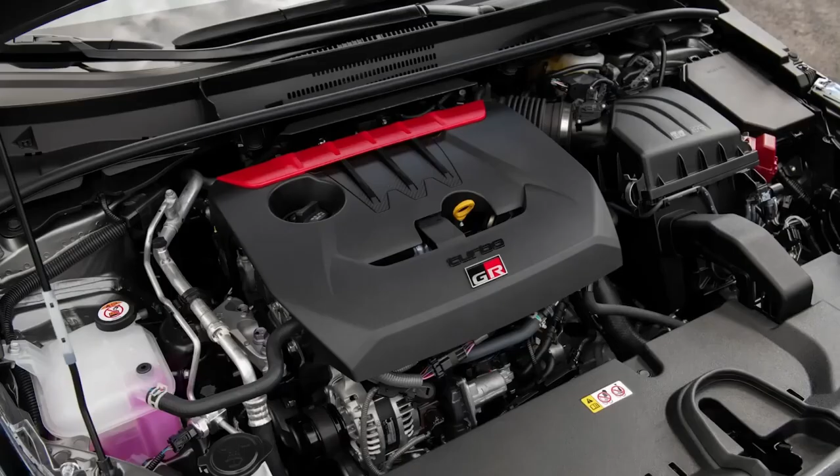In conclusion, Toyota has already made waves in the automotive world with their hydrogen combustion engines, but when they unleash the water-powered engine, it'll be a whole new ball game. Get ready, the future of driving is about to change forever.